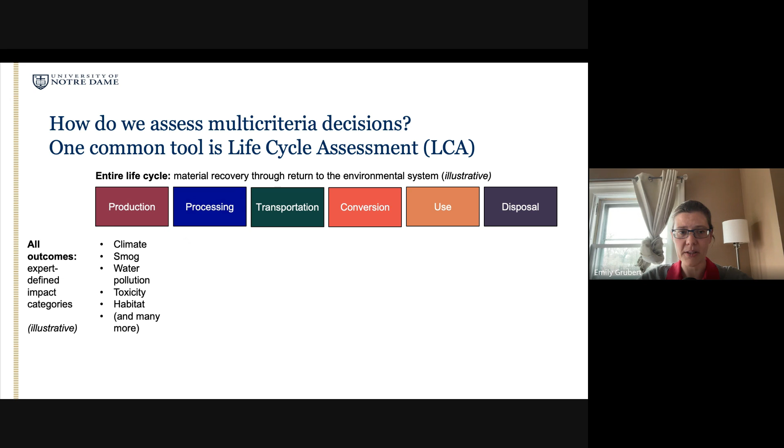Fundamentally, though, what LCA is designed for is to try to detect all the kinds of outcomes that might be relevant for what you care about when you're looking at an environmental system, that typically is things like climate change, but also smog, water pollution, toxicity, habitat, many other things that we see as being pretty common as you think about what kinds of environmental impacts you might want to try to avoid. So the idea is you look at all of those criteria across all of these different life cycle stages and try to get a pretty comprehensive picture of what's going on.

So fundamentally, as a decision support tool, what makes LCA so powerful, particularly in contrast to a lot of other methods that are out there, is that you're really looking for opportunities to identify what we call burden shifting, basically moving an impact from one area to another, whether that's a different place in the process, so burden shifting across the life cycle, or burden shifting across different environmental compartments is sort of the LCA terminology here, where maybe you are vastly increasing water pollution in exchange for a lower impact on the climate change front or something along those lines.

But the idea basically is to set up a situation where you're able to spot where those burden shifts are happening and then compare alternative decisions that you might be making with the intent of choosing the one that is least burdensome, but also maybe being able to design a system that's actually better at avoiding some of those major impacts and maybe looking for opportunities to reduce them. So this is what LCA is really good at, this burden shifting analysis and generally prospective evaluation.

What LCA is used for, but is not necessarily what it is fundamentally designed for, is a lot of the time sort of compliance-based estimating functions. So essentially saying you have to do a life cycle analysis in order to determine precisely what your greenhouse gas intensity of something might be retrospectively. LCA generally is an incredibly data-intensive method, and so one of the issues that we see quite a lot when it gets used in this way for compliance or for tax credit purposes or something along those lines is that the level of certainty that you have about the numbers that you're getting out are extraordinarily dependent on your inputs.

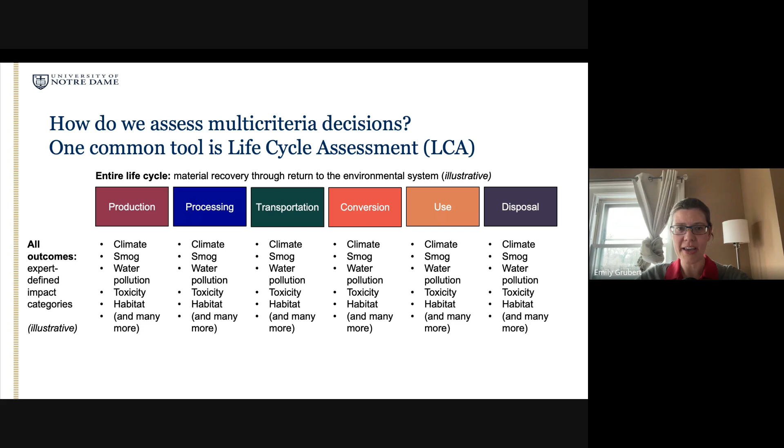What I'm going to maybe propose to you is there are ways where LCA actually turns out to be incredibly important for thinking about what clean heat policies might look like that are not necessarily the ones that people generally expect. So to really put a fine point on that, life cycle assessment as such is a formalized decision support framework rather than a calculator. And so when people, I think, get a little bit nervous about outputs, usually the problem is with the underlying data, not the decision support framework itself. The issue a lot of the time is how we collect data, particularly around things that aren't necessarily well tracked.

Methane is a really good example of this and comes up a lot in the heating context where, you know, we're quite good at estimating how much CO2 is emitted when you burn natural gas. It's a stoichiometric chemical process. We know if you have an efficient combustion process, how much of that carbon is going to be converted into carbon dioxide to really high specificity. And we know how much gas we're burning because people pay for it and track it very closely. Methane that's leaking along the life cycle of that gas is much, much harder to track. And so that, though it is really important for evaluating what the greenhouse gas emissions of something are in a life cycle framework, is actually a really challenging data problem and is part of the reason why this tends to give you answers that may look quite different from each other.

So I think in the back of your head, thinking about LCA as a decision support framework that's very dependent on its input data, not a calculator, probably explains sometimes why you might have two people both saying, I did an LCA and I got vastly different answers. It's usually a data problem in the back of it.

So LCA, capital LCA, lifecycle assessment, is what we generally use to refer to the framework governed by the ISO 14040 series. This is the one that looks across all lifecycle stages, across all types of impact criteria. That's distinct from what you'll see people talking about when we say lifecycle analysis or lifecycle thinking, which tends to be more just things that are looking at one impact across its whole life cycle. So related, but it is a little bit different when you start talking about formal LCA.

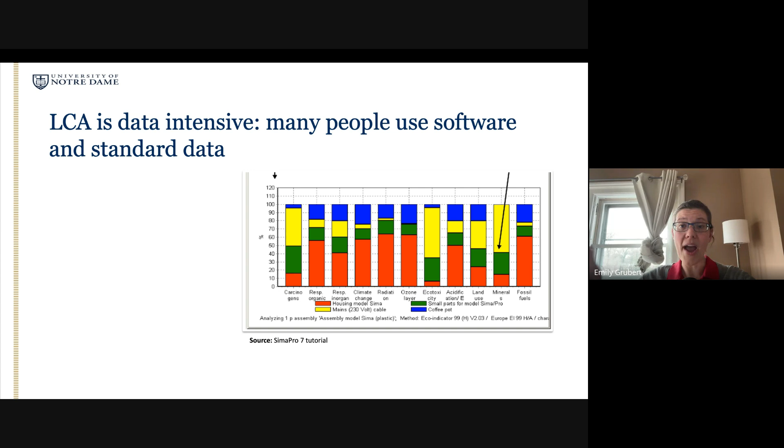That's not always a bad thing, right? If you're using data that are actually correct for your particular process and therefore getting a different answer from other people, that's appropriate and basically what this is good for. If you are using data that just haven't been vetted, it's actually kind of hard to tell the difference between a situation where you're using really high quality data and really low quality data and why you're getting a different answer than somebody else might be.

So this all kind of leads up to the point that I think many of you are probably familiar with the GREET model, which is basically an Excel-based combination life cycle evaluation model and database. So GREET basically seeks to evaluate the greenhouse gas emissions and then a couple of other impacts.

So water intensity is one that they've delved into a little bit, originally associated with alternative transportation fuels. And that's kind of expanded to a lot of other areas because many of those alternative transportation fuels are also alternative fuels for other processes. So things like RNG, hydrogen, clean electricity, those types of things are pretty well represented in GREET at this point.

But GREET, kind of contrary to a lot of these other softwares, is, again, an Excel-based system, but it also is one that includes a lot of data that has basically been refined over many years by the folks at Argonne National Lab. Part of the reason why I'm dwelling on this is because GREET oftentimes gets brought into both federal and state level policy processes that demand or can benefit from some use of life cycle analysis in carbon contexts in particular.

Because of that, there tends to be a bit of a perception that the GREET numbers are absolutely representative for the United States. In some cases, they are very much close enough and get used that way. But I think it's also relevant to know that GREET oftentimes does get adapted to the context that it's actually being used in, where people change some of the inputs to reflect the particular context that they're in or a particular future policy context.

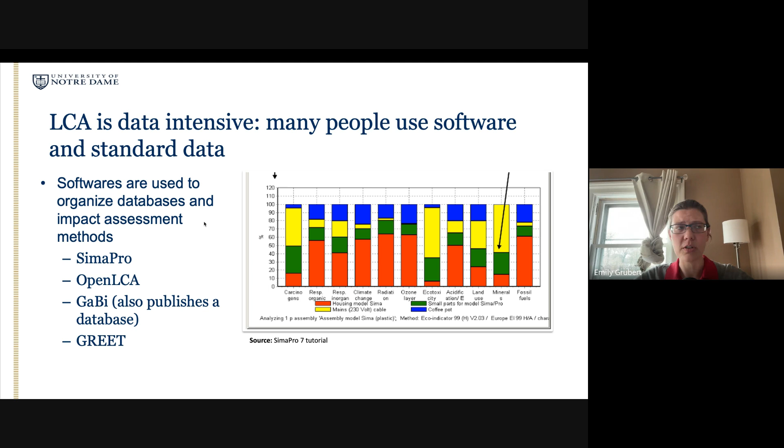One of the other things that I want to talk about with regard to LCA before getting into the specifics about how this applies to clean heat is that the model framework is fundamentally based on marginal and incremental estimates in a way that can affect how you do policy analysis in ways that aren't necessarily super visible. This is one of these things that you just need to decide when you're making a model. It's not to say that this is a wrong way to do it, but it is relevant to understand when you're thinking about how people are actually using LCA.

Basically, the idea within a life cycle assessment is that the incremental environmental impact from doing something happens linearly based on how much of something you've made. So it's maybe useful to understand that life cycle assessment is widely considered to have been first developed to evaluate Coca-Cola's choice of using plastic bottles or glass bottles for transporting the soda that they were manufacturing.

So the idea was, let's actually try to see what the trade-offs are between heavier manufacturing costs for glass versus some of the transportation benefits or waste issues that show up when you use glass versus plastic, and really trying to get into a whole bunch of different environmental impacts based on that individual productized thing.

So the design has been around, like, what is the impact per bottle? What is the impact per unit of concrete that you're manufacturing, or something along those lines. Because of that, when you have nonlinearities, or when you have really big capital investments of environmental impact, such as if you're building a really large facility that has a lot of embodied carbon in it that's not necessarily really well tied to a bunch of individual units of output, it can be a little hard to determine what's going on.

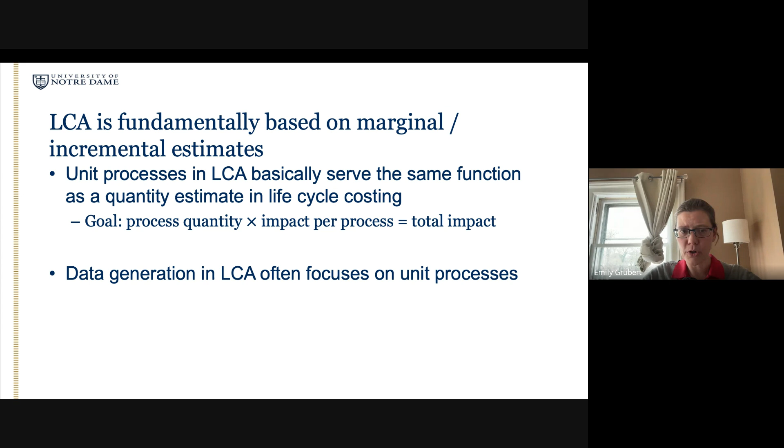The other thing here that's maybe useful to know is that because of that, data generation for life cycle assessment purposes usually focuses on unit processes. So when people spend time trying to derive a bunch of data that might be usable in an LCA context, it's usually a per unit type of thing. So what is the CO2 intensity per unit of hydrogen? What is the CO2 intensity per unit of electricity? Something along those lines. And you don't necessarily see a lot of data focus on, again, these more embodied processes.

So where does that show up? Basically, if you have a situation where you're expecting a lot of dynamism in your system, you have to be pretty careful about good scenario design, because for something like decarbonization, you actually do expect a particular input to be changing over time. So if I'm looking at a building, for example, and I know that as part of my life cycle, that building is going to be demanding a certain amount of electricity every year, and I also know that the electricity system is getting cleaner over time, if I fail to account for that in the way that I'm designing my scenario and in the way that I'm designing some of my data collection, I'm going to end up with a pretty significant underestimate of the potential environmental benefits potentially of actually doing something like electrification.

So basically, if I have a system that says for 20 years, I'm going to be using 12,000 kilowatt hours of electricity in my house, and based on the impact of electricity in my grid area right now, which I'm in Indiana, we're still about 50% coal here, I'm going to end up saying something that basically says electricity is going to give me a pretty high greenhouse gas burden over time, because I'm assuming that every single year I'm applying this 1 pound of CO2 per kilowatt hour factor that maybe currently applies.

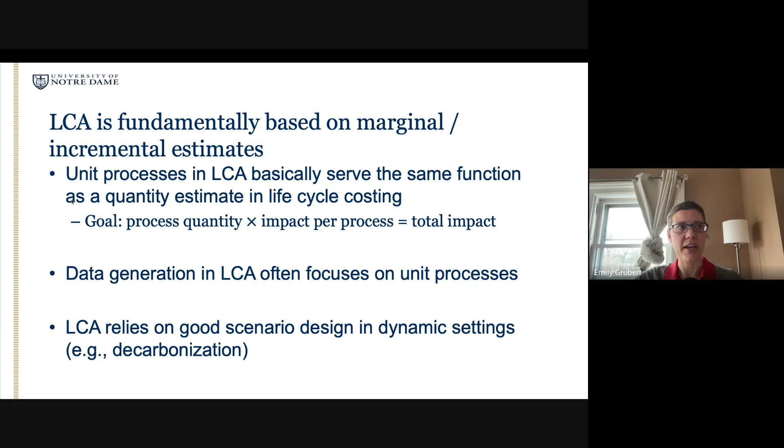Okay, so how does this apply to heat? I think this is a really, really interesting context to be thinking about LCA and also thinking about decarbonization. As we know, heat is really pretty life critical, particularly in colder places where, if you're out of heat for even a day, you might die. In that context, really trying to understand what is it that we can do to decarbonize these systems in a way that's safe and make sure that people actually have access to the service when they need it

is actually really, really critical. And so thinking carefully about clean heat in that context of this is a life safety thing, but it's also something where we really need quite a lot of attention to the environmental profile of the inputs that we're using. I think that really elevates this as a conversation and makes it important to be very, very careful about life cycle assessment design when that's being used as an input to these policy processes.

I like this chart, which was published in the Washington Post a couple of years ago, because it basically just shows you how relevant some of the conversations around fossil to non-fossil switching are. Basically in this graph, the lighter yellow is places that primarily use electricity for heat. You see that mostly in warmer parts of the country. The purples and reds are basically where you're using fossil fuels directly, generally speaking, either in the colder places or in richer places that have a lot of access to natural gas. And then you see the darker brown, there's some wood in there as well.

But the point here, I think, is that in a lot of the places where heat is actually most critical to keeping people alive, those are also the places where we tend to rely on fossil fuels. And there are some good reasons for that, just in terms of energy density and cost and things like this. But it means that when we're talking about clean heat, that transition conversation starts to become really, really relevant as a fossil to non-fossil switch, and thinking about what it is exactly that we're trying to investigate when we think about what that switch might look like.

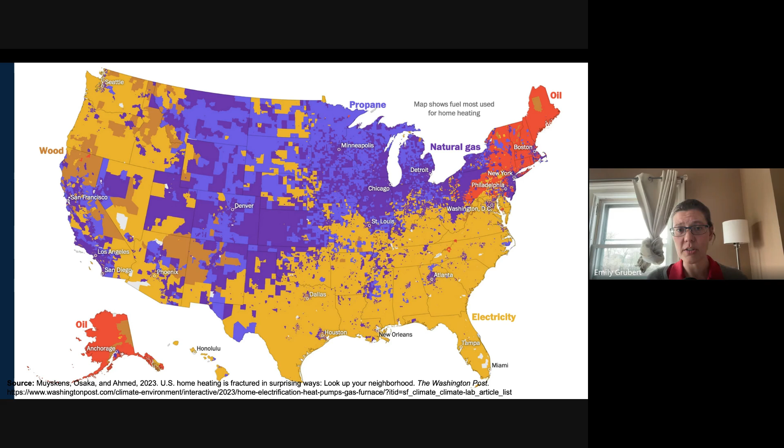And so you are eventually going to need to have a big step change that involves a lot of infrastructure turnover. But if you're not actually requiring your models to show you whether something is capable of reaching the end goal or not, you're going to end up in situations where you potentially spend quite a lot of money on alternative fuels that aren't really capable of getting you to the final goal.

So the other thing about this that I think is kind of important to recognize when we start talking about electrification in particular, which kind of gets brought up as the way that you get heat to be able to take advantage of renewable resources that are zero carbon ultimately, is when we think about net zero requirements for the United States, we're talking about a very, very significant expansion of the electricity system.

Basically, we're talking about a system that needs to go from being about 1 terawatt of installed electricity capacity to somewhere between 5 and 9 terawatts of installed electrical capacity. That's in large part based on how much we're expecting to see heat load, which is simultaneous, non-sheddable in the moment, and generally coincident peak, driving this need to have a lot of electrical capacity available at the same time, generally speaking, also in the winter time when you're going to have pretty low contribution from your solar systems.

So basically the point is you need to see a lot of electrical build out very, very quickly in order to make clean heat via electricity plausible. There are a couple of implications of that. One being that you can't actually assume that inefficient electrification deployment is actually going to be plausible, because you do run into just manufacturing and deployment constraints on this electricity. The other is that you may actually start to see pretty different environmental characteristics, even of renewable energies, as you get to these much, much larger scales.

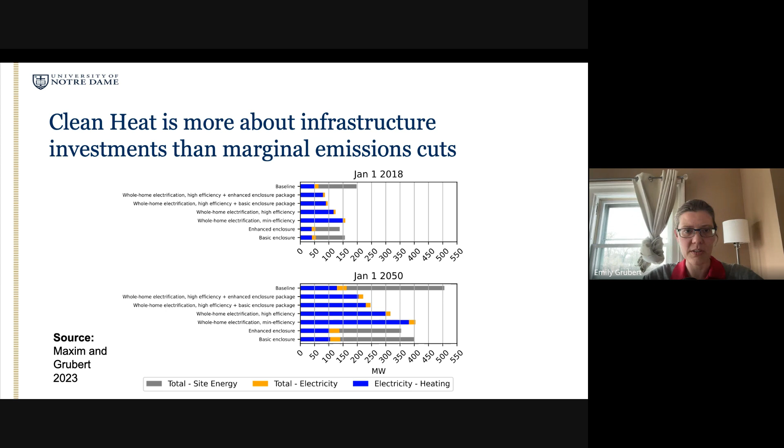So in my last 5 minutes, and then hopefully we can have some Q&A, what I wanted to talk about quickly, because we're in the clean heat space and this comes up a lot, I do quite a bit of expert witness work about renewable natural gas because this issue is so prevalent. RNG is a really good example of where well done life cycle assessment with careful scenario development can point you to some very important conclusions. But you don't always get there depending on how people engage with these topics. So I'll step through where people tend to talk about RNG and then some of the scenarios that show you pretty different results.

Basically, renewable natural gas is typically describing biogenic methane, so methane derived from some sort of biological material, usually from a landfill or a wastewater treatment plant, that is cleaned up to the point where it's capable of being put into a pipeline along with fossil natural gas. The assertion by a lot of advocates is that RNG has really negative carbon intensity. And so if you mix a little RNG with fossil gas, you can have a system that on the whole is net zero, or whatever carbon intensity you want, depending on how much renewable natural gas you mix in.

It's often used as a justification for paying a premium for renewable natural gas as a component of the fuels people are using to meet greenhouse gas targets. What I'm going to step through is the assertion that this cannot actually reach the kinds of targets people are generally talking about, and it tends to be a pretty significant distraction when we talk about clean heat because of some of the underlying industrial structures that change in response to these incentives.

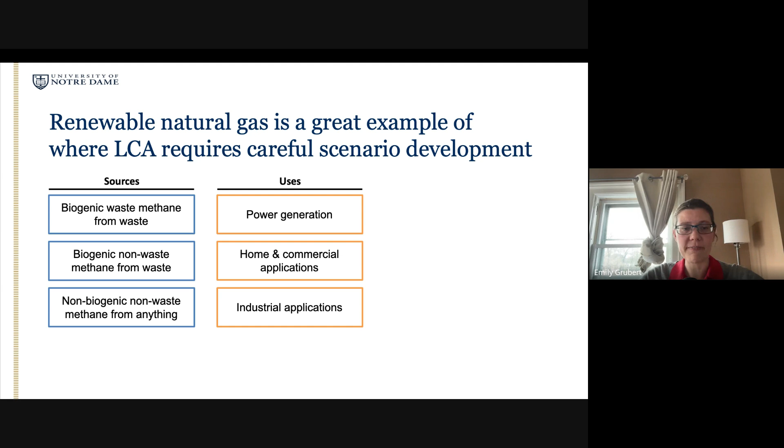There are a number of different places that you can pull the carbon to potentially make it into methane. But the idea here is essentially that you have some other methane that is being made on purpose. Then this gets kind of funneled through the typical uses of natural gas. So power generation, home and commercial applications, which is usually heating, and then a little bit of cooking as well. And then industrial applications. So, big factories and heat for various industrial applications.

And then the counterfactual, which is kind of important, is basically just a description of what you think would have otherwise happened to that methane. So generally speaking, people will talk about trying to evaluate the carbon intensity of renewable natural gas based on assuming potentially it's displacing some other resource. So maybe I'm using RNG instead of natural gas, so I should get some kind of credit for avoiding those emissions. It might be that I'm taking methane and diverting it from a flare where I would have been converting it into CO2, or it may be that I'm taking that methane and diverting it from a vent where it's just reaching the atmosphere directly.

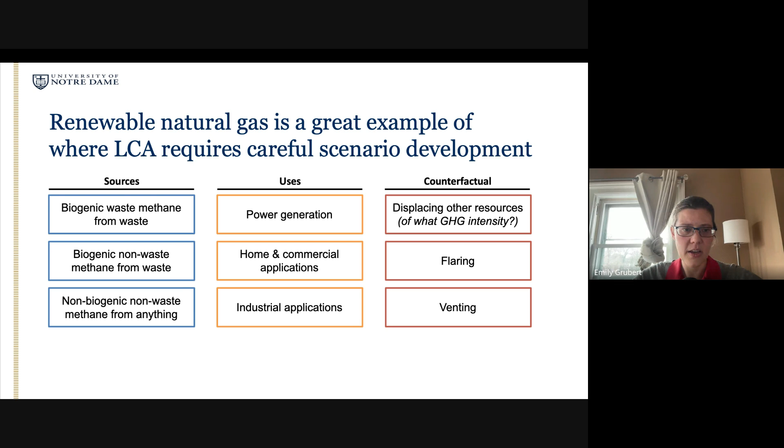Generally speaking, people that are advocating for using a lot of RNG in contexts that are focused on trying to reduce greenhouse gases are basically talking about a very specific pathway where you are taking biogenically derived waste methane, so methane that you would not have produced on purpose, it just sort of happens, that's also being derived from waste, using it in basically any application that you use natural gas for, and then making the claim basically that because it's, first of all, displacing a greenhouse gas intensive resource, typically natural gas, that you are avoiding some amount of CO2 emission, and then also making the assertion that otherwise that methane would have gone to the atmosphere via a vent. So essentially just the methane goes straight to the atmosphere.

The claim then is if you take that methane and burn it instead in a way that displaces these greenhouse gas intensive resources, you end up with this highly negative greenhouse gas emission profile associated with using RNG. Because methane is a much more powerful greenhouse gas than CO2, and because this biological origin of the carbon means that we don't generally count that CO2 as being climate impactful once it's burned, basically the idea is you are taking a waste product that was unavoidable, you are diverting it from reaching the atmosphere directly as a very intensive greenhouse gas, and you're displacing a really greenhouse gas intensive resource. Therefore, this has a really, really high benefit to the climate, and therefore you should assign it negative greenhouse gas emissions.

This is the strategy that basically gets you to the point of being able to say, mixing 2 or 3% RNG into a fossil gas could get you to the point of net zero emissions from that fossil system. So you'll often see this in the context of clean heat. Like we don't need to switch over our natural gas systems. We just need to add a little bit of RNG.

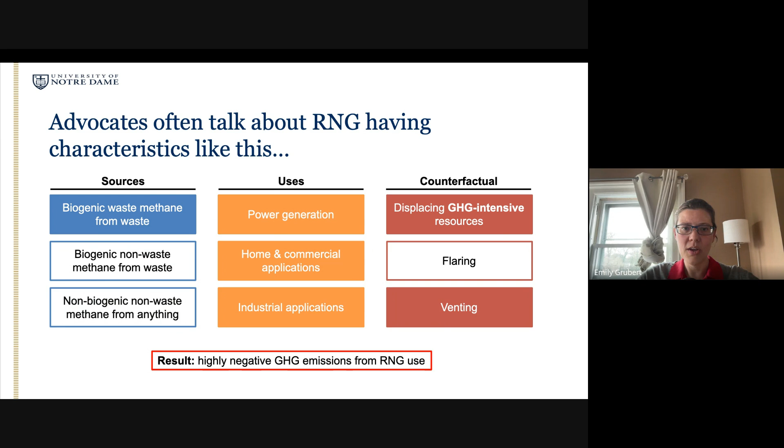And so at the end of the day, basically, if you really carefully consider the system as it's likely to exist and use this life cycle evaluation to really understand what would happen in response to this emerging policy, you see that the counterfactuals that are likely to actually be in place are quite different from the ones that lead you to this assumption that you have very, very negative greenhouse gas emissions. So again, probably RNG has lower greenhouse gas emissions than fossil gas, but it's probably not negative, and it's probably actually quite a bit higher than clean electricity at the end of the day.

The reason that I bring this up is, first of all, to show what LCA is really good at, like when you really can start deploying scenarios to understand what's going on, but also to kind of point out that in a clean heat scenario, being pretty attentive to what kinds of resources are likely to get you to your ultimate goal, as opposed to producing marginal benefits that are maybe in line with a slow linear decline in some sort of policy target, can actually lead you to some sort of counterproductive investments at times,

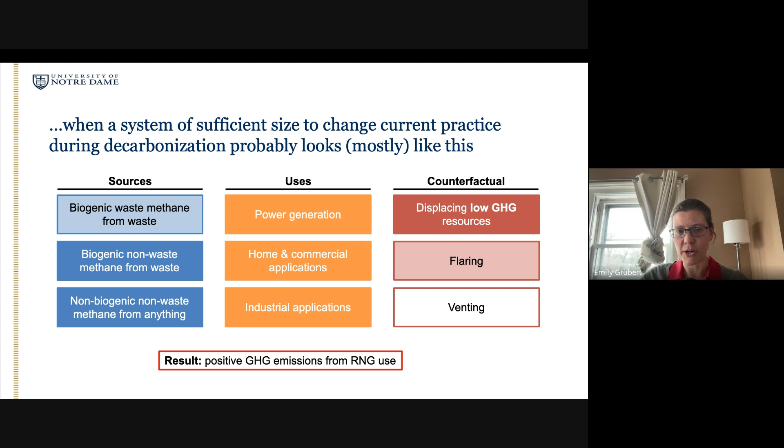where you might be spending a lot of time first converting a system over to one that uses a lot of RNG or a lot of hydrogen, which kind of follows a similar logic, and then needing to ultimately transition to something like electricity or geothermal at the end of the day anyway. Forcing that two-step transition instead of a one-step transition is pretty common if you're not very careful with your life cycle evaluations. So I'll stop there.

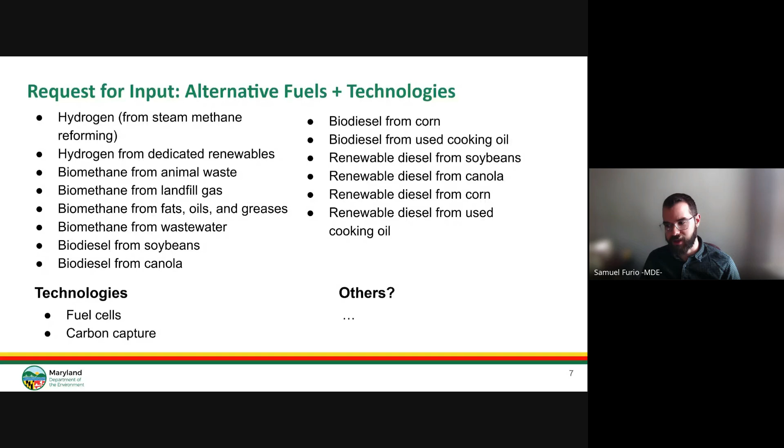Thank you, Cameron. And if you have submitted feedback already from session 1, you don't need to resubmit that same feedback. But if you have new or additional feedback, you can submit that to us for review. And that feedback will inform future sessions of this working group and considerations by MDE. If you're seeing that form for the first time, some of the questions you'll see in there are: what other technologies should be considered? What should MDE consider as we evaluate these technologies? And if you have supporting documentation, what documentation can you share? You would email that to the Clean Heat team separately, and we'll get you that email on the last slide here.